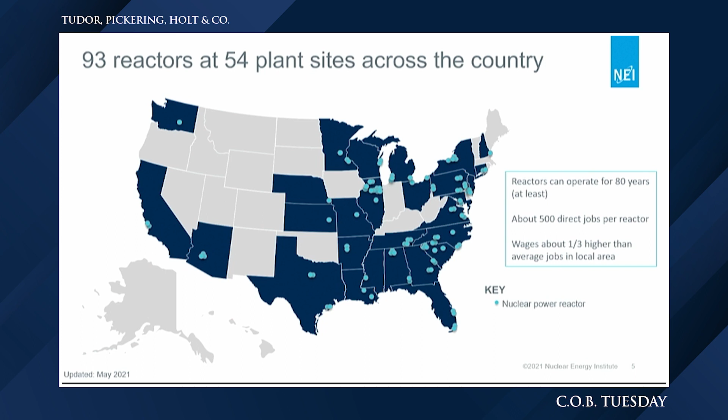So let me get to the fun part. Let's get to the plants themselves on the next slide. Right now, we have 93 nuclear units at 54 plants across the country. I'll get into how nuclear fits in the broader perspective momentarily, but one thing to note is where we fit in the picture. A lot of our plants are deeply appreciated by the communities in which we operate. They are a strong source of well-paying long-term jobs, and we have a great deal of enthusiasm and support in the communities in which we operate.

These are well-paying jobs, often with union representation as part of them, and that great support has been a foundational element of how we've continued to maintain the fleet that we have and work towards expanding in the future.

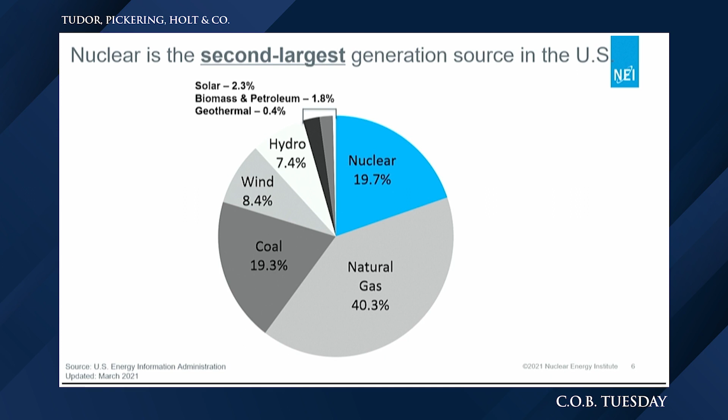Nuclear energy provides about 20% of the electricity in the US and has for a few decades now. Last year we were the second largest source of power behind natural gas and just ahead of coal. I expect this year coal will move back ahead with the coal to gas switching going the other way for a little bit.

But I think the more interesting part is how nuclear fits in this carbon-free discussion. We provide the majority of the carbon-free generation in the US, and if you go back for the last 30 or 40 years, it's actually been about 2/3 of the carbon-free electricity in the country that has come from nuclear energy. Hydropower has been by far the second largest source over that time period, and wind is growing quickly.

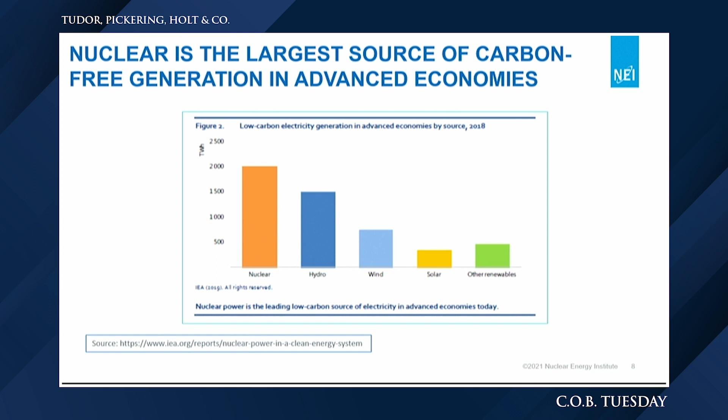Hey Matt, could I ask you, while we're in this section, those 93 plants—could you give us a sense of the average vintage or average age, or what would you tell us about the lifespan of those?

Sure. Right now, just about every one of those 93 units has received a license renewal from the Nuclear Regulatory Commission. So let me back up—when plants go into service, they receive an operating license for 40 years of operation. The plurality of our plants were built in the 1970s, with some capacity completion in the 1980s and some stragglers shortly after that. But for the most part, we've got a lot of plants that have received this license renewal to go to 60 years.

One thing worth pointing out, though, is there's been a lot of capital turnover at these plants. My father was in the Air Force for many years, and we used to marvel at the B-52s they used to fly in Vietnam, how those same planes were still in operation in Desert Storm in the 1990s, despite the fact there wasn't a single original component on them. The nuclear fleet has a lot of similarities to that as well.

So Matt, is that another way of saying that the heyday of public acceptance of nuclear energy was sort of late 60s to mid 70s? Is that the sweet spot of its popularity?

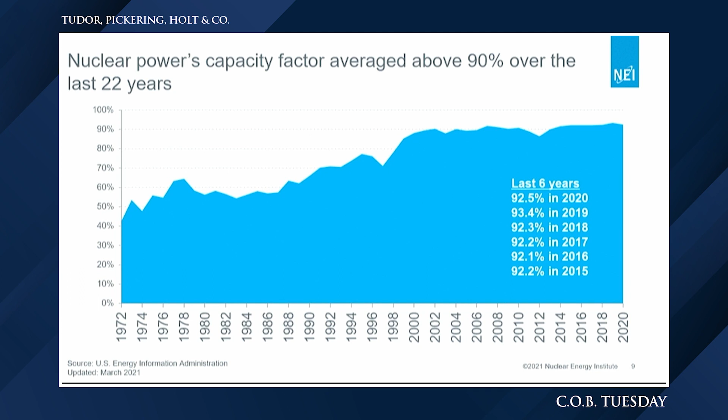In 1990, the capacity factor of the fleet was closer to 60%. Between 1990 and 2010, 20 years, we added about 2% of capacity to our nuclear fleet. However, during that same period, we increased our generation by 40%. We ended up producing a lot more nuclear power because we got much better at optimizing the efficiency of how we operate the plants. This has been persistent in how the plants have performed, and we've begun to see these lessons learned expand overseas as well to operational profiles abroad.

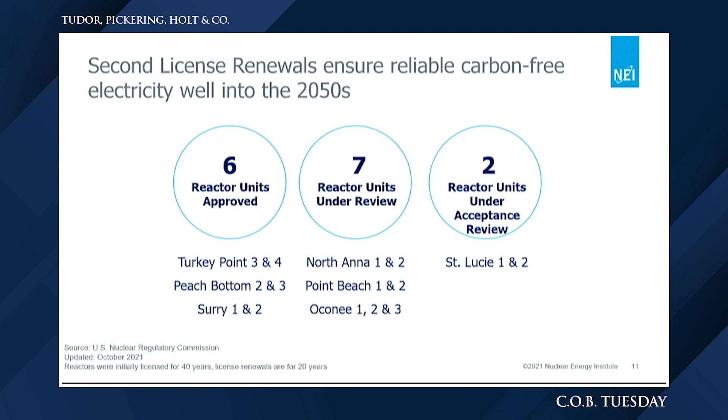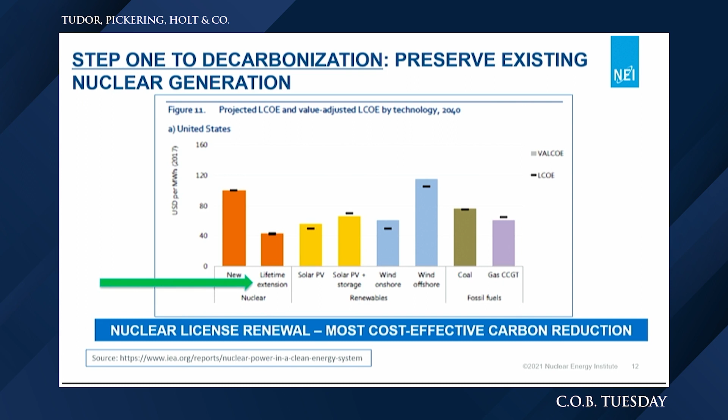Let's go to the next slide. This is from the International Energy Agency, and as they looked at what the most cost-effective forms of carbon-free generation would look like, the one they started with, the lowest cost one, is license extension of nuclear plants, which is a pretty straightforward observation. The most cost-effective way to keep carbon-free electricity is to keep what you got and then go add some more. That message has gotten through.

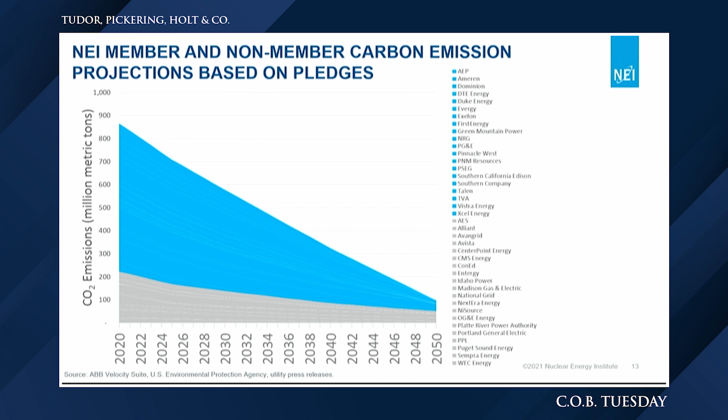Let me go to the next slide. So what we're showing here are the trajectories of utilities that have made commitments to reduce carbon emissions over time. The ones in blue are our members, the ones in gray we're tracking as well. What we see is an industry driving towards lower carbon emissions. And what we also are seeing is the appreciation of, well, how exactly are we going to get there? What is that portfolio of technologies going to look like that's going to make those commitments a reality on the grid?

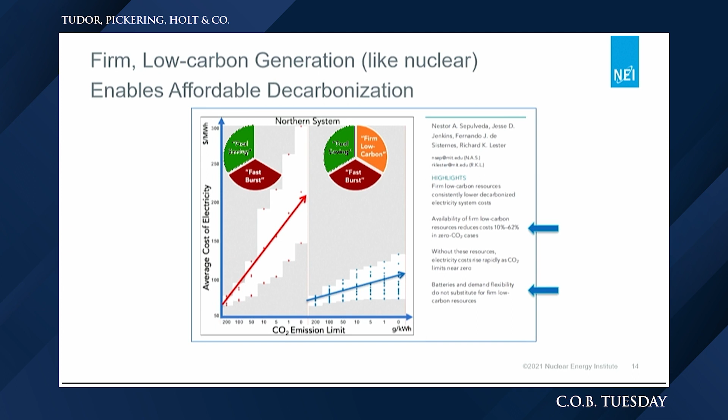Comparing that to on the right, where I add the third leg of the stool, which are firm, low-carbon generation technologies - nuclear, fossil fuels with carbon capture, geothermal. What you see is a dramatic difference of the cost profile, which is the y-axis there. So having this complementarity of, yes, I need renewables, yes, I need storage, but I also need something that can run 24/7, and especially take some of the seasonal variability and complement that technology. Let's take a different perspective of this. Let's go to the next one.

Earlier this year, Princeton put together a very large analysis, what they call Net Zero America, looking at a handful of scenarios for what it's really going to take to have a low carbon grid.

Of all things, I think this might even have been on John Oliver last week, which is a very bizarre thing to say in a presentation here, but I think that actually happened.

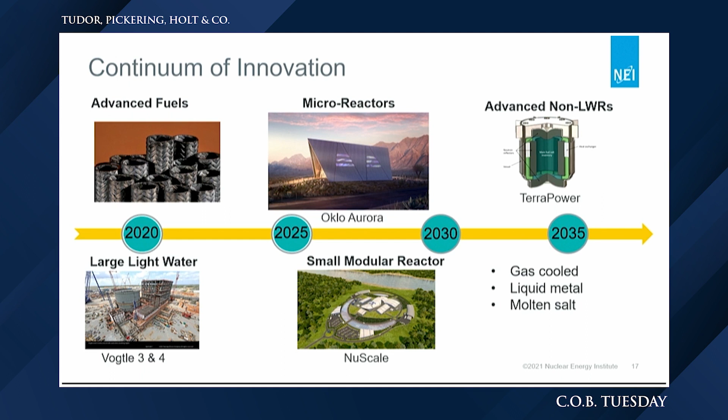Starting here, we are actually building 2 large light water reactors right now down in Georgia - 1,100 megawatt electric AP1000s. The first one will come online next year, Vogtle 3, and then Vogtle 4 will come online the following year. But then as we look out in the 2020s, we're looking at some new deployments in the mid part of the 2020s with some microreactors, and then larger reactors in the latter half of the 2020s, and I'll talk about that. But then as we look forward, we begin to think about a rapid development and a large number of deployments coming in the early 2030s.

Next slide. Now, in terms of what we're going to have to offer, it's going to be quite a variety. We've got advanced reactors, and when I say advanced reactors, what I really mean is something that's not operational right now. We've got a range of sizes coming from microreactors, which we typically think of as less than 20 megawatt electric, but could be as small as 1 megawatt electric - compared to the 1,000 megawatt electric I talked about that's being built down in Georgia.

And then we have small modular reactors - those by definition are less than 300 megawatt electric. We have a number of companies developing those, both water-cooled designs like what we currently operate in the U.S., and non-water-cooled designs - meaning the coolant for the fuel is something like high-temperature helium or liquid metal, like liquid sodium or liquid lead, or it could even be molten salt. And actually, in the case of molten salt, we may use molten salt as the fuel too, so both liquid fuel and salt for the coolant - kind of an interesting design.

And we're going to have a range of sizes coming here, and I'm going to take a few minutes and talk about a few of these. But let's move on to the next slide.

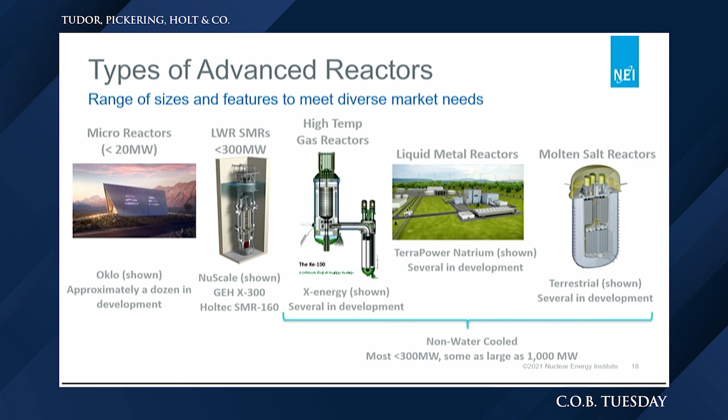Many of these companies I'm sure you've heard of—Westinghouse, GE, Framatome. Others you may not have heard of. TerraPower you've probably heard of, many if not all of you, through the news. That's one that's partially funded by Bill Gates. But the majority of these companies are privately funded. So really exciting work going on here.

And this is not the entire landscape, because I can name about five others or so that are either focused outside the U.S. or are based outside the U.S. to begin with, that are not members of NEI. So, a huge number of companies involved here.

So, Everett, could I ask you a slightly unfair question? There are a lot of investors here in our audience thinking about funding new technologies. Is it your perception that a financial firm can get into this space and invest a reasonable amount of money with reasonable risk? I think the picture sometimes people get is that nuclear is dollars in the billions, cost overruns, and you'd better be careful.

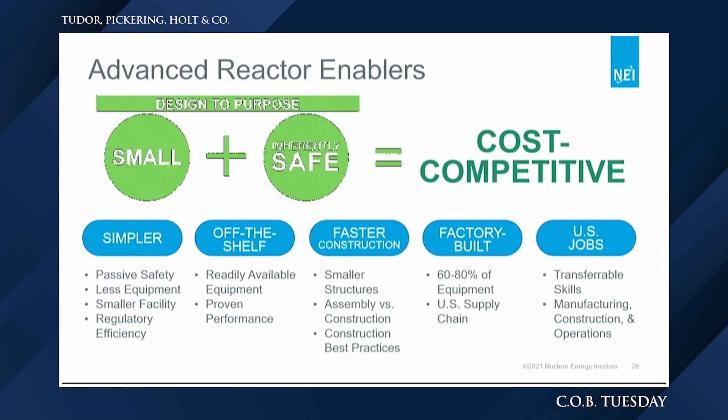So hit the next slide, please. I'm going to take a few minutes now and talk about some particular designs—the ones I'm focusing on are those that have projects lined up, planning to build in the not-too-distant future. So NuScale—they are by far the furthest along among advanced reactor companies. They actually got a design certification from the Nuclear Regulatory Commission last year, in 2020.

They're a novel design in the sense that each reactor is a small modular reactor, 77 megawatts electric. They plan to deploy them in either a 4-pack, 6-pack, or 12-pack—so you, as the customer, get your choice of 4, 6, or 12 reactors in a single facility. That provides the ability to rapidly adjust total power up and down by adjusting individual modules. Something that's different now is air cooling for condensers, condensing that steam back to water using air cooling.

That's nice because think out west for a second—we're just talking about Texas, but think out west where you have major water challenges. This would minimize water usage. So an interesting idea there.

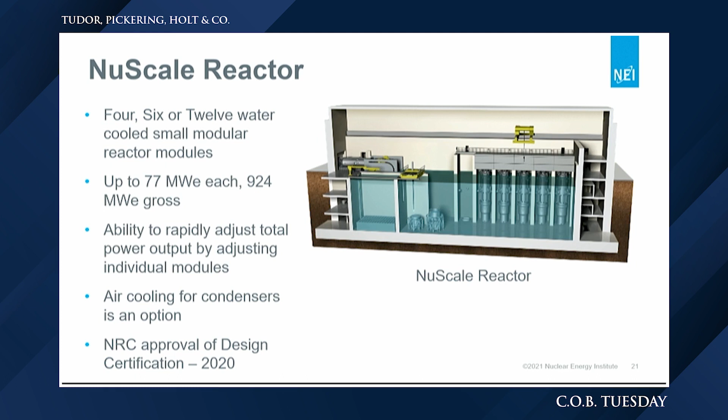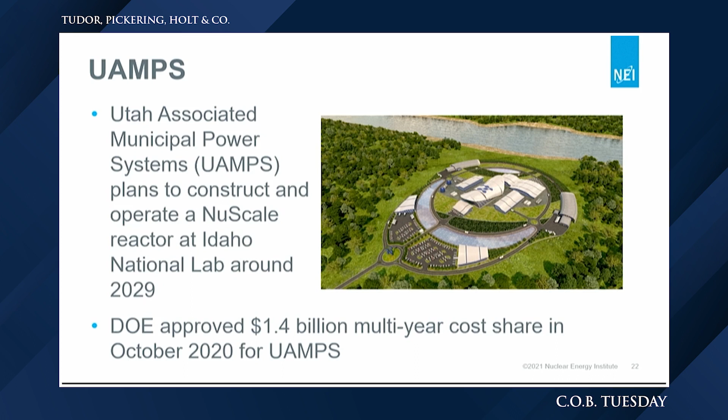Here we have a customer, Utah Associated Municipal Power Systems, a collection of municipal utilities. They are planning to build, construct, and operate the NuScale reactor at Idaho National Laboratory, bringing the first module of a six-pack online in 2029. UAMPS does not currently have any nuclear assets. This is the carbon-free power project, focused on that carbon-free aspect. They have a $1.4 billion multi-year cost share from the Department of Energy.

Now switching gears and going way down in size, Oklo's Aurora fission battery. They're a microreactor, 1.5 megawatt electric, about 10 years or more before refueling. Put the fuel in, sit there for 10 years or so, then you need to refuel. That's different from now, where we refuel every 18 to 24 months for the fleet. They are the first non-water-cooled reactor to have an application in front of the Nuclear Regulatory Commission, submitted in March of last year, accepted for review, and under review right now. They plan to demonstrate also at Idaho National Laboratory around 2026.

You may be wondering what the market for this is. Think remote locations, think Alaska, where you may have to bring in diesel fuel once or twice a year depending on the weather. Great opportunity here, and the mining industry in Canada, for example, is very much interested in this because one of the big challenges in mining is getting access to power.

The Department of Defense is also interested in mobile microreactors, and here they plan to do a demonstration also at INL around 2024. The concept is a reactor that can be flown in by plane, set up in 3 days, operated for as long as you want, shut off, and 7 days later shipped out, moved somewhere else if needed, then started up again. A very innovative concept supported by the Department of Defense.

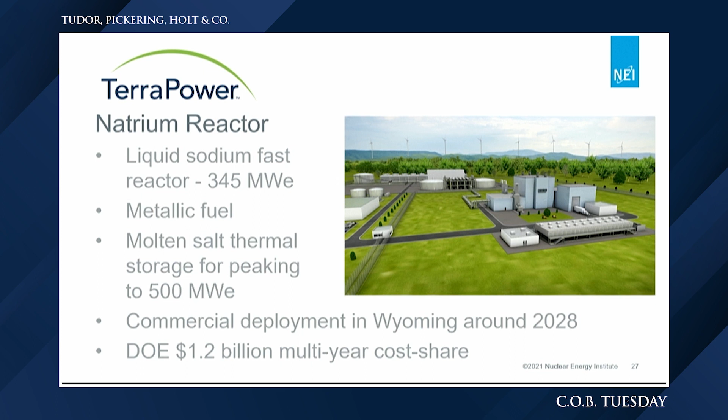I'm going to touch on the two main demonstration reactors here. First is TerraPower with the Natrium reactor - a liquid sodium fast reactor, 345 megawatt electric. They're attaching to it from the get-go a molten salt thermal storage system. The easiest way to think about this: if you're operating next to a solar plant during the daytime when the sun is strong and your solar's putting out a lot of power, this reactor will put less than 345 on the grid and heat up the sodium, heat up the salt. Then at night when the sun goes down and solar stops producing, they can pull energy out of that molten salt thermal storage system and peak out at about 500 megawatt electric onto the grid. They're going to deploy in Wyoming, which currently has no nuclear - they do mining for uranium, but no nuclear. They're planning to deploy around 2027, 2028, cost sharing with DOE.

And here, X-Energy - a completely different concept. X-Energy is a pebble bed helium-cooled gas reactor, 80 megawatt electric, built in a 4-pack, 320 megawatts total. They're going to deploy in Washington State around the same time period, 2027, 2028. Here they're using TRISO fuel - particles of uranium coated in graphite and carbon, with thousands of those particles put together into a pebble. That pebble is about the size of a billiard ball. So the way this reactor works, think about a gumball machine.

You put the pebbles in the top, they come out the bottom, you check it, see if it's been in the reactor long enough. If so, you discharge it. If not, put it back in the top, and add new ones as you go along. So, innovative concept, exceptionally robust fuel that was developed at Idaho National Laboratory.

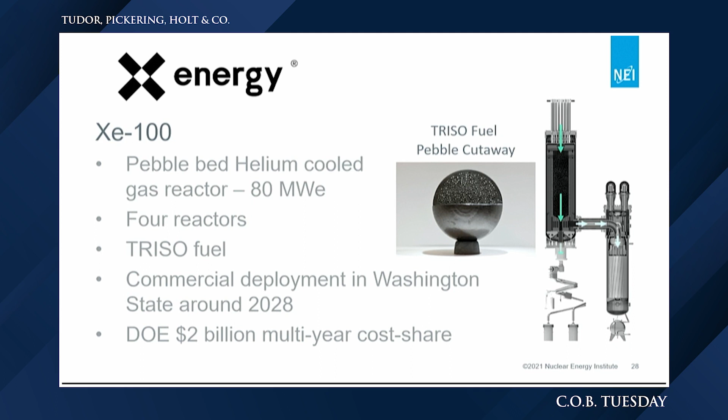Thinking about future applications, something your audience may be interested in: these reactors operate at higher temperatures, the liquid metal and molten salt reactors, affording the opportunity with 500 to 700 degrees C outlet temperature to do things beyond just electricity. So you could do hydrogen production much easier, much more efficiently, and use process heat.

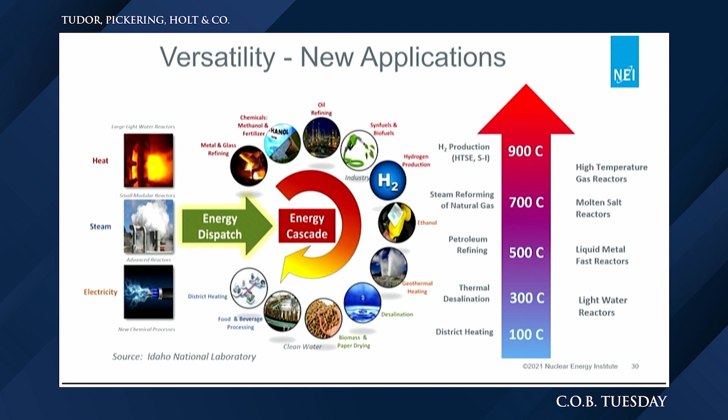And hydrogen — right now we are looking at hydrogen usage and generation. We have four projects underway with the current fleet: Exelon, Energy Harbor, Xcel, and Arizona Public Service have all received DOE awards to do hydrogen generation. One of them will be bringing online hydrogen generation in '23. They're going to use either electricity or, in the case of one utility, high-temperature heat and steam from the reactor to generate hydrogen. The hydrogen can be used for transportation, industrial purposes, and in one case as an energy storage medium, fed back into combined cycle natural gas to reduce carbon emissions there. So the industry thinks very much that hydrogen is a big part of the future in terms of decarbonizing the sector.

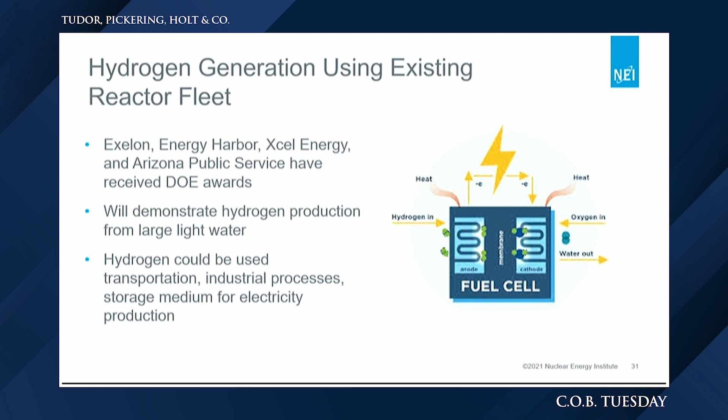Kind of wrapping up here, key takeaways: consumers and policymakers are increasingly demanding low carbon electricity, and we're seeing huge support from Congress, both in the infrastructure bill, the reconciliation bill, plus previous legislation and increases in appropriations. You're seeing support at the state level for preserving the fleet, and very much interest from states in building new reactors. And of course, maintaining existing nuclear is the least expensive way to avoid carbon emissions. So with that, we think wind, solar, nuclear, and storage all need to work together. You've seen that in some of the designs here, like TerraPower, combining storage from the beginning. Very interesting time.